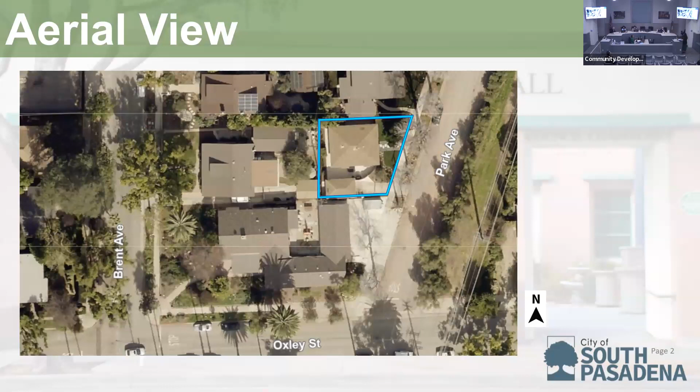The project proposal includes a 63 square foot first story addition, a 619 square foot second story addition, and a request for an administrative use permit for tandem parking. The project qualifies for an administrative use permit due to it being under 10,000 square feet, and it is unfeasible to provide a standard size garage.

Moving on to the site details. The zone for the property is residential medium density. The lot size is 3,754 square feet. The house size is 916 square feet, and the garage size is 333 square feet. The structure was originally built in 1961, and it is a minimal traditional architectural style.

Next are the site plans. To the left is the existing site plan, and to the right is the proposed.

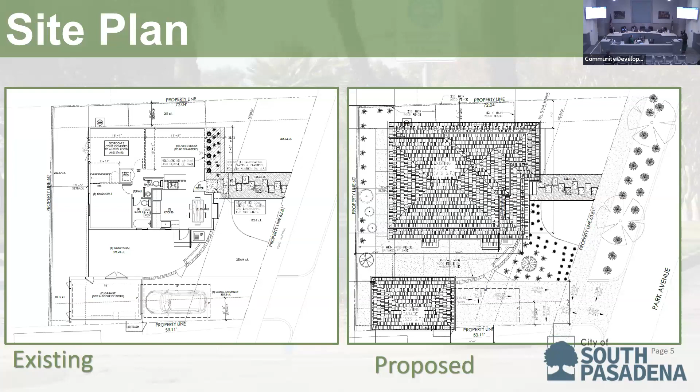This next slide shows that the existing property has 2 bedrooms and 1.5 bathrooms. The first floor will be reconfigured to accommodate 1 bedroom at the living room, and the living room will be expanded. The second bedroom will be eliminated to include the stairway. In the proposed image, you can see the hatch where the 63 square foot addition will be located on the first floor.

The second floor plan will include 2 bedrooms and 2 bathrooms.

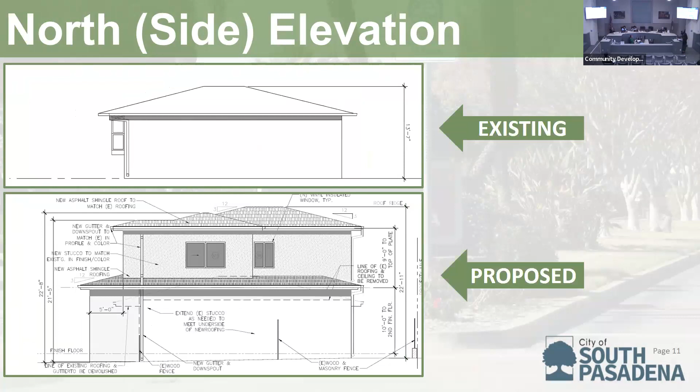This is the side elevation, where you can see the articulation of the second story addition. Next is the other side, the north side elevation. And finally we have the rear elevation. The proposed materials are to match the existing, which includes stucco cladding and asphalt composition shingle roofing.

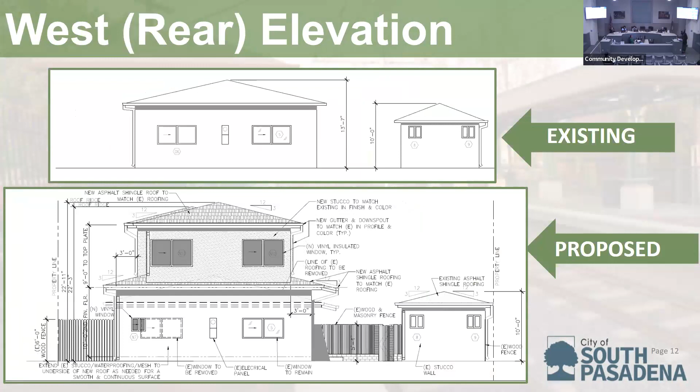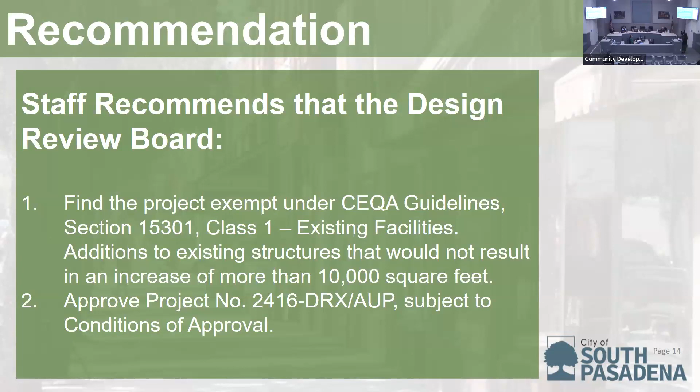As such, staff recommends that the Design Review Board find the project exempt under CEQA guidelines, section 15301, class 1, existing facilities, which covers additions to existing structures that would not result in an increase of more than 10,000 square feet. And second, approve project number 2416 DRX AUP, subject to conditions of approval. Staff is available to answer your questions, and the applicant representative is also here to answer any questions.

Does anyone have any questions for staff? I don't. I don't either. I actually have a question.

On the floor plan, it looks like there's only addition to the northeast corner. That's the only addition on the first floor? That's correct. Going back to the slide, the proposed has the diagonal hatch where the addition is located. But on the front elevation, the east elevation, it looks slightly different on the south side. If you go to the comparison, it's just more of a clarification, not really a question.

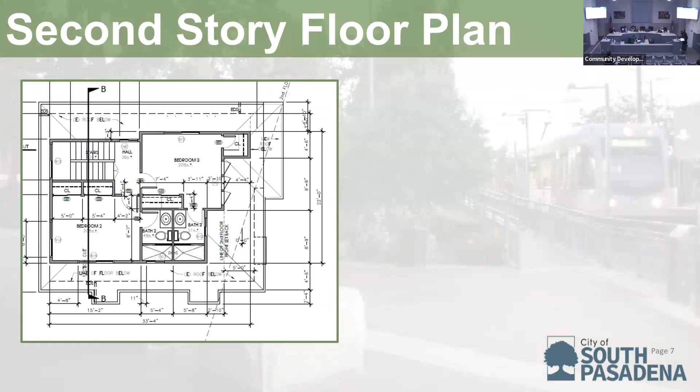If you go to the elevations slide, it just looks like the windows moved on the window on the left. So it looked like there was an addition there. Do you see where the window on the left is? It looks like it's centered now on the wall. So it looked like there was an addition there. I see what you mean. Should I ask the applicant that?

Yes, I was just wondering if there was another addition somewhere else. No, that's the only addition that is called out. Okay, that was more like a clarification. That's my only question, I just wanted to see where all the additions were.

Does the applicant have a presentation? No, she does not. Does anyone have any questions for the applicant? I do not. No. I guess my earlier question carries on to the applicant too.

My question is, in the elevation it looks like the front door is not moving, correct? The front door looks like it's staying where it is. My name is Janice Soon, I'm the architect and also representing the owner. No, the hatch area is what we're showing as the addition. Here's the pointer.

All the walls will be rebuilt because the ceiling is getting raised - the roof is being raised. So really the first floor is getting rebuilt. So structurally, the post won't really matter because you're raising the entire ceiling of the first floor, right? So that post can go away, and you can relocate the front door, technically.

It would add a little bit of square footage, but I know they're not over in the count - I was quickly looking at it. Yeah, they're not maxed out, so I don't think so either. I don't know how much that square footage is, but it's probably, there's no way it's over 50 square feet. They are not maxed, right?

But with regards to the front porch, and having the two wall planes like it is - it's already currently counted. Because it is a non-conforming lot, it has to have a porch area in order to qualify for a 15-foot front setback. How far setback do they have to have the porch? Is there a minimum requirement? For it, the code doesn't specify - it just has to be a porch area.

The reason why I was asking for the south elevation is what you're seeing there to the right-hand side, where you've got the stairs at the ground floor and the railing - that's your entry into the house. So that's what we're talking about. And that exterior line we're seeing representing the wall, I'm saying extend that all the way back to the addition. So instead of it going there and then jogging in, it would essentially be the same - you'd still have a patio, you'd still have the front steps. It would just, the door would be in plane with that wall extension. I don't know if that makes sense.

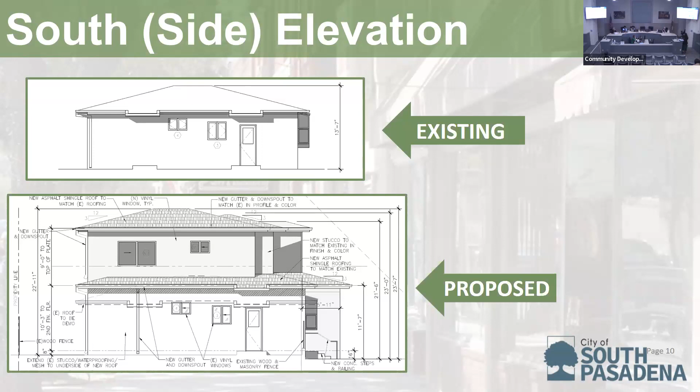On the right-hand side, that little jog in the front over the addition, if we pull that south corner of that addition down over the stairs, then that will create a porch, more of a porch. I think it'll have that effect, like a porch.

So I do think it needs to be revisited, and whether the recommendations we're making are the preference, or to just look at it and say how else can we address the entry here. Obviously we want to make sure we're complying, that we've got the patio area, and we're not going over the square footage allowed, but I do think it needs to be addressed in some way.

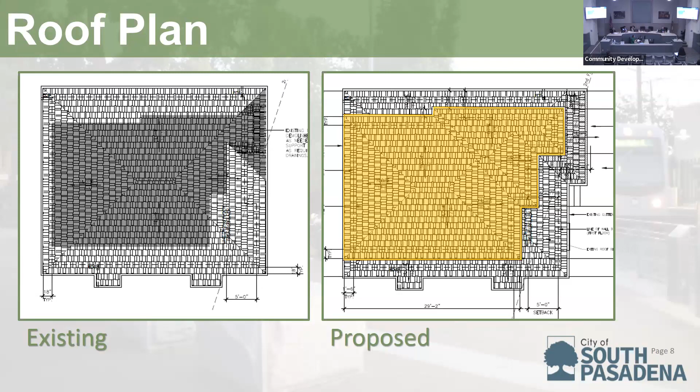I'm comfortable though with the idea of maybe working on it as a chair and then come back as a chair review. That would work for me. I know Chair Nichols is not here, but I'm fine doing the chair review since I'm here and have history with the project too.

So does anyone want to, are you ready to make a motion? I can make the motion. I move to approve the project with a chair review for looking at the location of the front door and centering it within the entryway, and also studying the entryway itself, specifically considering the alcove and the plane of the front entry door, as well as the roof line and the roof design. That's the motion. I can second that.